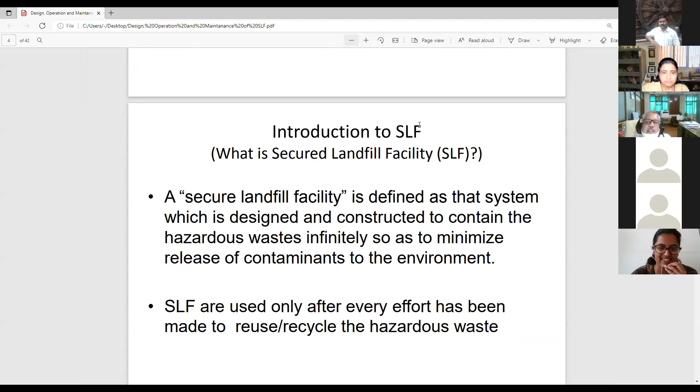So the topic is basically secured landfill for hazardous waste.

Will you please excuse me for 2-3 minutes? I have a few signatures to be done. Okay. Sorry, so just bear with us for another 2 minutes, then he is going to join. Professor Vaidya, you are muted. Am I audible now? Yes, sir.

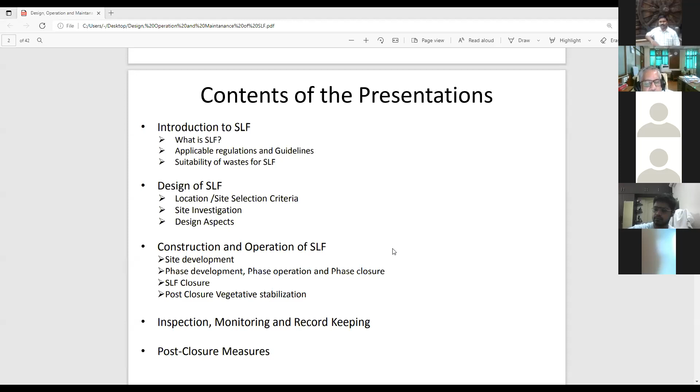So the topic is related to secured landfill for hazardous waste, not for municipal solid waste, hazardous waste. And what are the criteria, how it is designed, and how you go about the audit of this typical landfill. So this is the brief outline of the presentation. What is the SLF, secured landfill? What are the applicable regulations and guidelines? The suitability of waste for secured landfill, design of SLF, construction and operation of SLF, and then inspection, monitoring, record keeping. So I tried to cover all these things in brief.

So secured landfill is basically strictly for hazardous waste. Hazardous waste is basically a waste which is generated by industry most of the times, and which, as per the regulation, is categorized as hazardous waste. You cannot call just any waste hazardous or non-hazardous. There is a criteria in regulation which has to be fulfilled to constitute one waste as hazardous or not.

And there are two ways to dispose hazardous waste, we will come to that later on, depending on the rules and regulation. It can be incinerated or it has to be landfilled. And the secured landfill facility is for the hazardous waste, industrial hazardous waste, which cannot be incinerated.

So SLF is defined as that system which is designed and constructed to contain the hazardous wastes infinitely, so as to minimize release of contaminants to the environment. In short, you are disposing hazardous waste in such a way that all its ties with the environment are cut off. It's a kind of tomb, you can say, or graveyard for hazardous waste, so that it doesn't impact the environment directly.

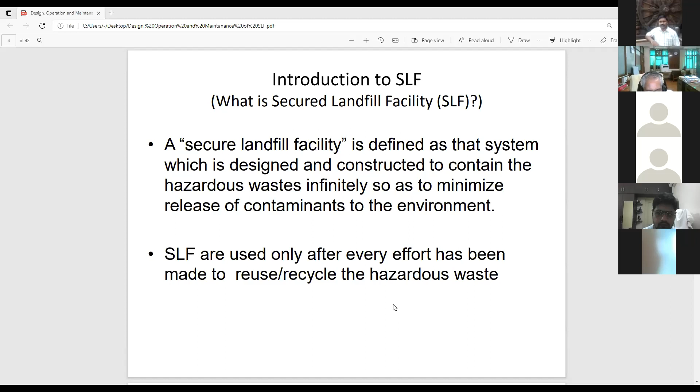And SLF are used only after every effort has been made to reuse and recycle. See, the hierarchy of waste management starts with waste minimization and finally goes to disposal. So if all your attempts for reuse and recycle are not economically or technically feasible, finally you have to go for secured landfill. That is the last option of waste management.

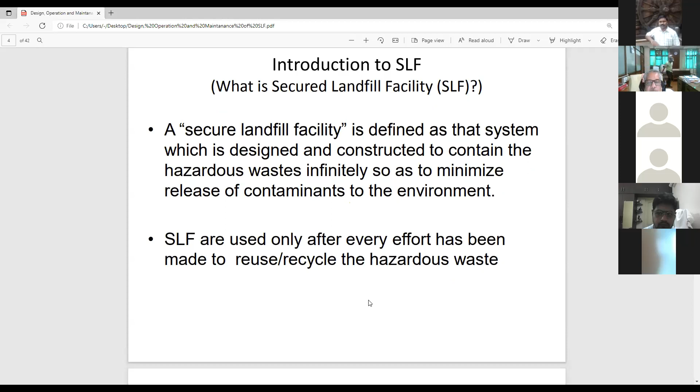Okay. Again, hold on for a while. Sorry for the interruption. There are certain official procedures I had to be involved in, and there are some urgent works from our stores and purchase. So I beg your pardon for this short leave and short break in the presentation. So let us go through the... Am I audible now? Yes, sir. You are audible.

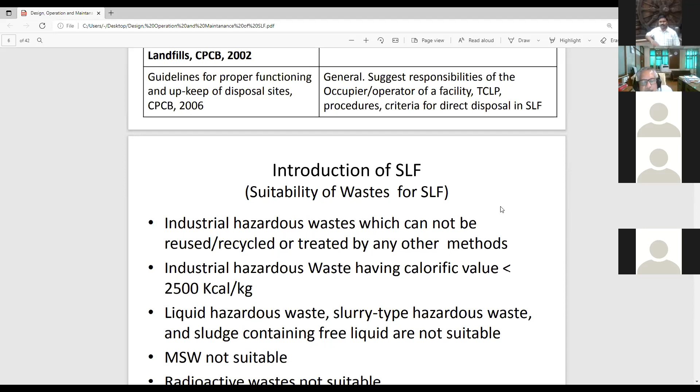There are only two ways of disposal prescribed in regulation. One is incineration, one is landfilling. And liquid hazardous waste, slurry type hazardous waste, and sludge containing free liquid are not suitable for landfilling; you have to make it suitable for landfilling. As it is, you cannot put liquid hazardous waste or slurry into landfills.

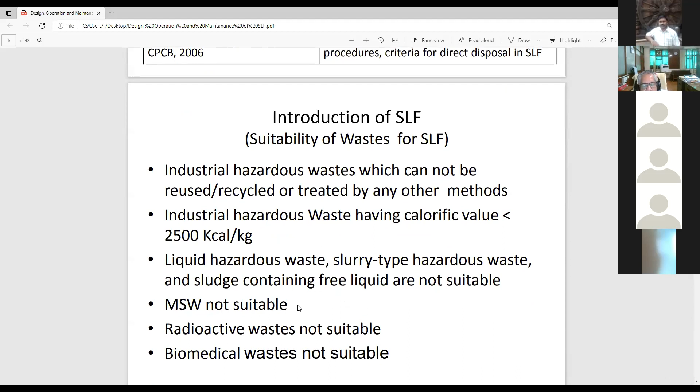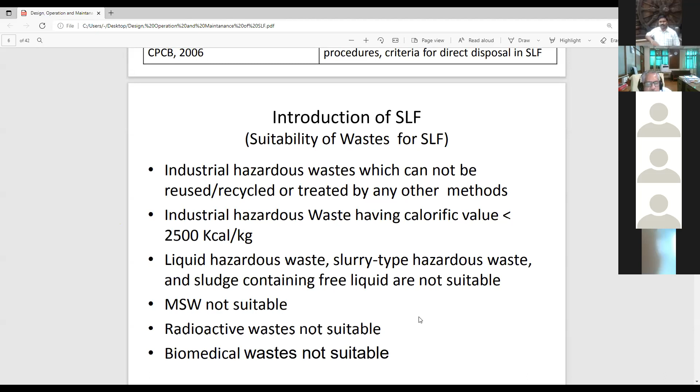Municipal solid waste is ruled out for secured landfill. It is only meant for industrial hazardous waste. Radioactive waste always has separate guidelines, which are only dealt with by Bhabha Atomic or the Department of Atomic Energy. Even we are not allowed to design anything or handle radioactive waste. Biomedical wastes are also not prescribed for secured landfill.

Now, what is the design of SLF? Now, you have to clearly understand secured landfill. There is actual civil construction, how liners are to be placed, all those things are there. But basically, the question is where the landfill itself should be located. And a landfill cannot be located at any location.

You have to have a detailed study of the area where the landfill is to be located, preferably a hydrogeological study, and all the details in and around that particular selected or proposed area. For example, it has to follow a minimum distance from any lake or pond. It should be away from any pond by at least 200 m.

Lake or pond minimum 200 meters. You cannot have anything within the radius of 200 meters. Then any river, flowing river, has to be minimum 100 meters away. Floodplain. Now river means floodplain. River is not the center of the river. Minimum distance from a maximum floodplain area should be 100 meters. That is the interpretation. And floodplain is decided on the 100-year data. You cannot have last year; the 100 years maximum floodplain you have to take, and for every river that data

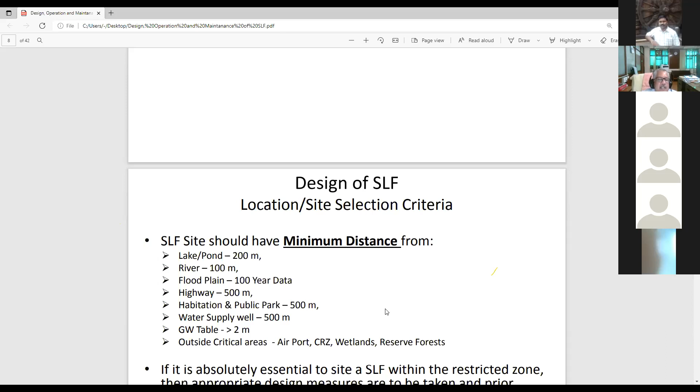And outside critical areas like airports, CRZ, wetlands, reserve forests, these are to be avoided. Even some monuments like Taj Mahal monument or some old forts, they cannot be in the near vicinity of the proposed landfill. These are the basic site selection criteria. Now you understand how difficult it is to get such a land, number one. But anyway, this is the criteria which is based on the environmental considerations. And if it is absolutely essential to site SLF within the restricted zone, then appropriate design measures are to be taken with prior permission from SPCB.

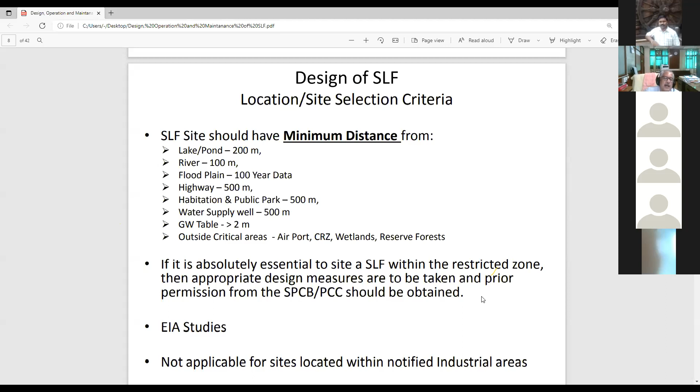Now, there are situations where you have to have a landfill within the restricted area. In that case, your landfill design becomes very rigorous and very robust and costly. And plus, you have to take care of all precautions in your design, with the prior permission of State Pollution Control Board. This is specifically allowed for some industries where there is no landfill available nearby. And then you have to go for environmental impact assessment studies for the proposed landfill site. And you have to get environmental clearance from the state appraisal committee most of the times.

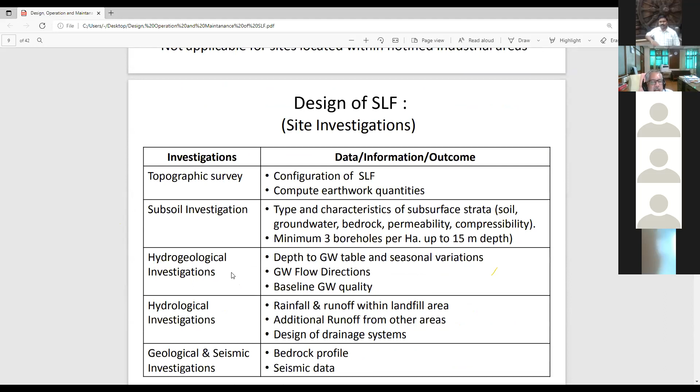And this is not applicable for the sites located within notified industrial area. Every state, every area has certain notified industrial areas. If proposed landfill is within that area, then probably you get rid of all these requirements. So these are the investigations which are required for the design of SLF. You need to have topographic survey, subsoil investigation, hydrogeological investigation, geological and seismic investigation. So practically you have to go for all on-ground and underground surveys for this particular design of the landfill, because we are dealing with hazardous waste and you are going to put it there for long term, probably infinite period, although we say 30-50 years, but that may not be

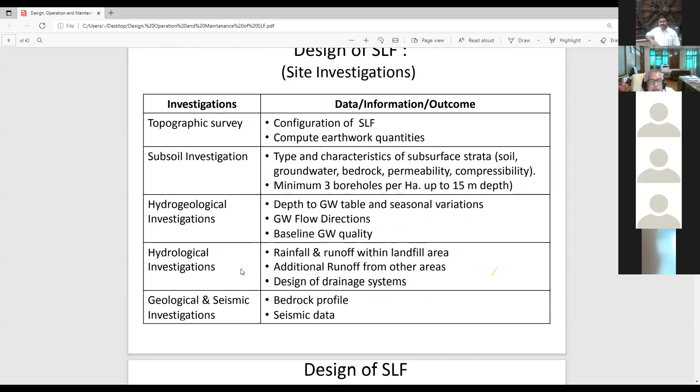enough. So the design life of secured landfill: active period will be 10 to 25 years depending on waste generation and availability of area. Closure and post closure period 30 years after active period. So you can say it's a total plan of 50-55 years, probably more than that. So active life and then post closure measures and monitoring is required. That is minimum for 30 years. This is the first criteria based on which your design is based.

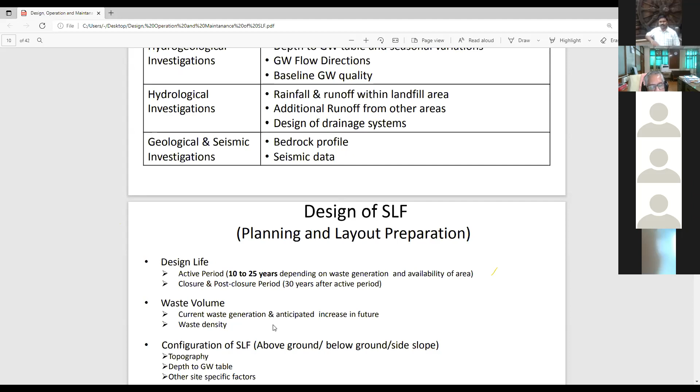Then waste volume. Waste volume is important as well as waste quantity, in terms of mass or weight, but volume is also important because you are going to put it in a restricted volume of landfill. Weight criteria is not there, it's basically volume criteria most of the times. Then configuration of SLF is to be decided on the basis of topography, depth of groundwater table, other site specific factors.

Just a minute, hold on, I am getting one call. Hello.

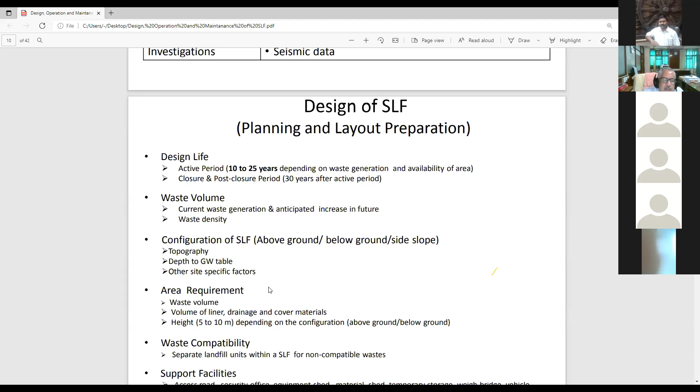See, if you want to invest, you can do anything, but then the cost and the stability requirements are to be met. So then area requirement will depend on waste volume, volume of liner, drainage and cover materials, and height of landfill. To what extent can you put waste into that? Now this is a question which is to be answered. So it will depend on whether the landfill is above ground or below ground, and the slope of the landfill and stability of the slope.

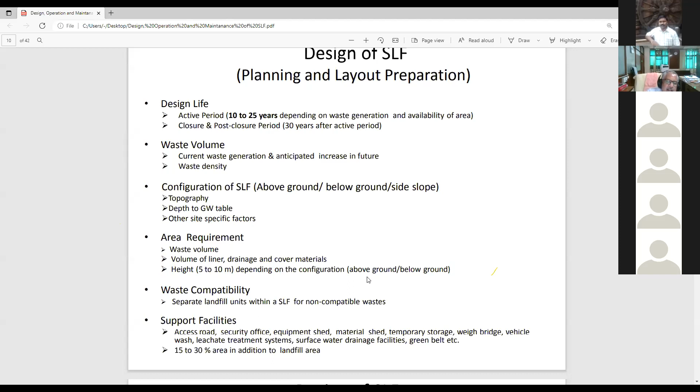You cannot have a vertical landfill unless it is concrete supported. Otherwise, normally it is a kind of pyramid, a kind of standard grave or standard tomb-like design. And for the side slopes, there are criteria given, 2:1 or something like that. And the stability of the slope becomes important to decide the maximum height of the landfill. And then the waste compatibility, support facilities, access road, security office, and the additional requirements in case of future or in case of some anomalies or shortcomings in your design, right?

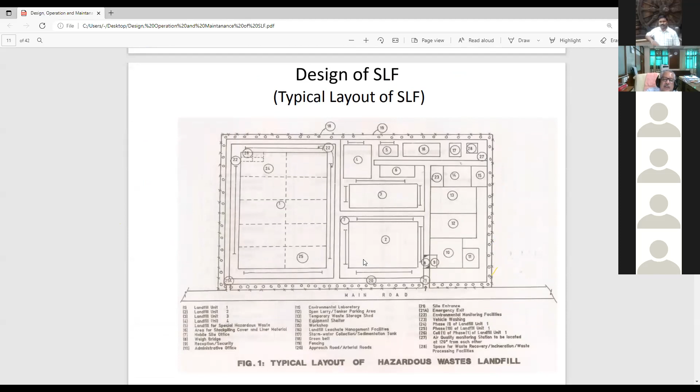So this is a typical layout for a secured landfill. You can see here, there can be landfill units 1, 2, 3, 4. Normally they are put adjacent, 1, 2, 3, 4, 5 like that. And there are all other things. There will be a laboratory nearby because you have to analyze the waste before putting it. Then you need a storage, a mobile site office, a weighbridge, reception and security. So whether it is a landfill or incineration, it becomes a kind of small industry in itself. I am talking of a common landfill site.

There are two types of landfills. One is captive landfill, where I, as an industry, am putting only my waste there. Still, I need all these facilities, but part of the industrial facilities can be used for that. And there are common landfill sites, because those industries which cannot afford hazardous waste management of their own, on payment basis, send their hazardous waste to these common facilities, and then the common facility is like an industry in itself. So you will find it's a kind of industrial layout. You can go through that.

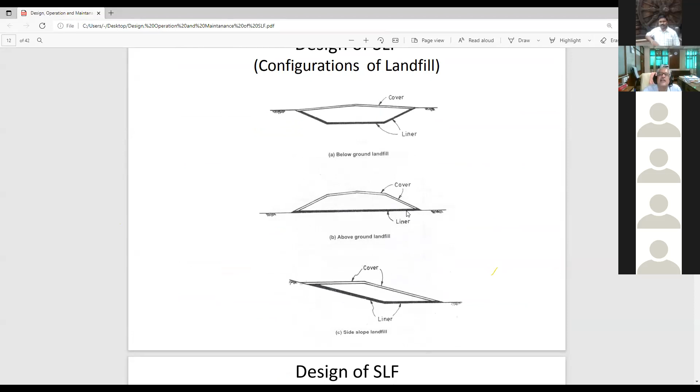And this is a typical design of the landfill. So it is a below ground landfill, figure A. Figure B is above ground. You can see the side slopes and cover at the end of this. And there can be sloping landfills also, because there are certain terrains where this kind of landfill is required.

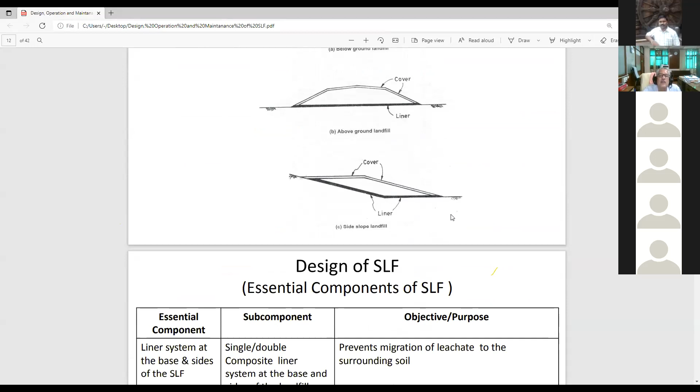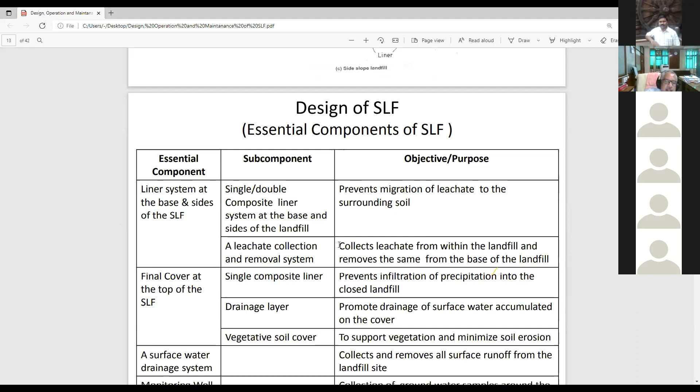Then essential components of landfill. There has to be a liner system at the base and sides of the secured landfill. It can be single, double or composite layer basis. Leachate collection and removal system is a must. What is the objective of landfill? It prevents the migration of leachate to the surrounding soil. Normally recommended is an HDPE liner, minimum 2 mm thickness. That is the minimum. If you have money, you can have 2.5 or 3, no issues. But it cannot be less than 2 mm. And it is an HDPE liner at the bottom and on the sides.

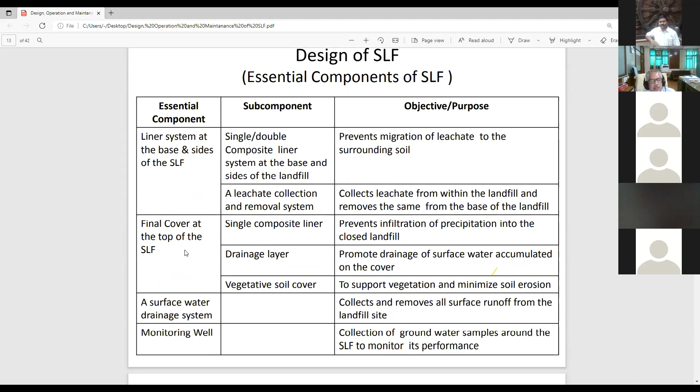And then you have to fill the landfill with waste, and finally a final cover at the top once the active life of the landfill is over and you don't have any more space to accommodate waste there; then it has to be properly covered. There is a procedure given for the secured landfill covering. So a single composite liner is there, a drainage layer is there, vegetative soil cover on the top of that, and then it looks like a recreational facility, but below it you have a lot of hazardous waste filled in.

And because there will be monsoon and rains on that, the surface water drainage system is a must; in any case you should not allow surface water or rainwater to get into the landfill. It has to be collected over the top of the landfill and properly separated. And an essential part of landfill is that around the landfill, you must have monitoring wells drilled specifically to monitor whether the landfill is intact or not, and the analysis of monitoring well water...

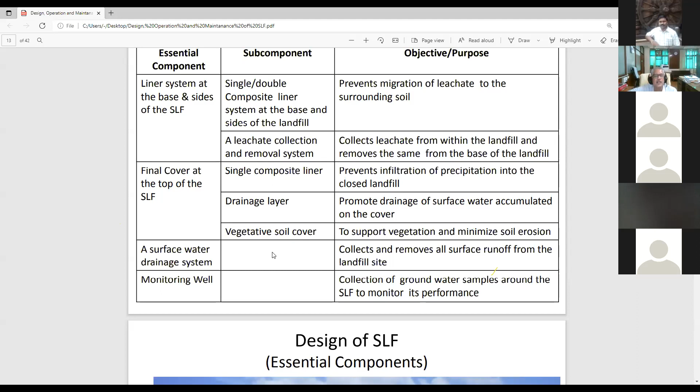You cannot imagine a landfill without a monitoring well. Otherwise, that cannot be. Then you have to drill another well for that. Now this is a typical design of SLF essential components. This you will find in any book, CPCB guidelines or on the internet. So there will be a primary leachate collection.

Now you can see it's a double liner system. So primary liner and secondary liner. And then there is a secondary leak detection. Secondary well is there, leachate collection. If you find anything in this, that means there is something broken here. Because no water or liquid is supposed to be collected in this area between the secondary and below the secondary liner. And if you get something here, that means primary and secondary both are broken.

So you can have this kind of 2-3 leachate systems. So the primary leachate system is a general leachate which is collected from waste, and that has to be treated separately. But secondary leachate should not be there. Otherwise, it indicates there is some flaw in the design or some breach in the landfill design.

And then you can have geomembrane, you can have soil cover. These are all different things. Basically you have to prepare a ground, then you have to lay the HDPE liner, then again you have to put a drainage layer and then soil cover, and every time there is a standard procedure given in all manuals.

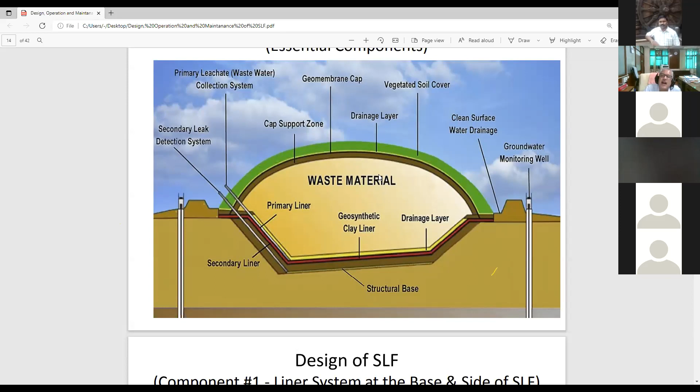And these are groundwater monitoring wells you can see around. These monitoring wells will indicate whether landfills have broken and they are contaminating the subsurface water or soil. This is for that.

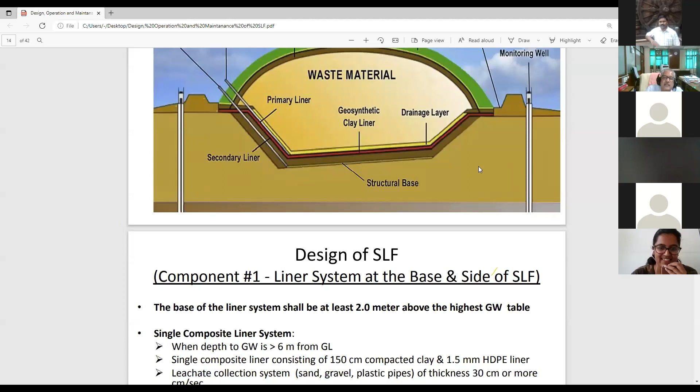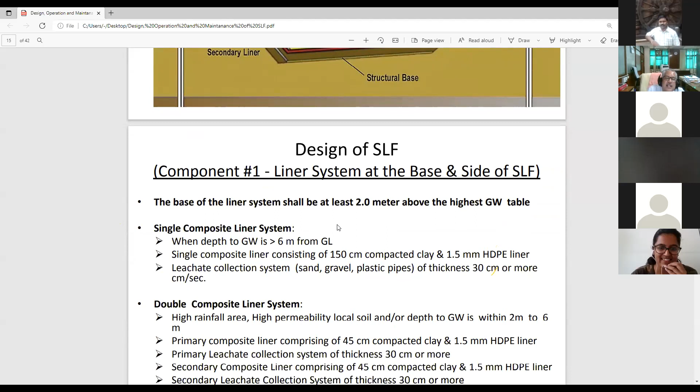Then liner system: there can be a single composite liner system when depth of groundwater is more than 6 meters below ground level. And double liner for high rainfall area, high permeability local soil, or depth of groundwater within 2 meters to 6 meters. Then you should have a double composite liner system, so that you doubly ensure that there is no breakage or it takes the load of heavy rains in that area.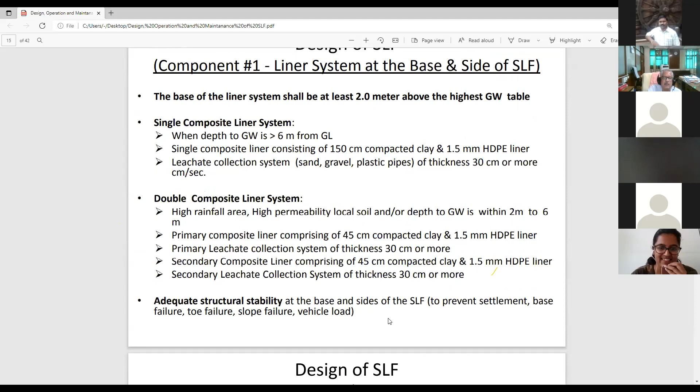And you have to ensure adequate structural stability at the base and the sides of the landfill. This is a typical civil engineering problem. It's a pyramid-like structure. So all cross sections are like trapezium, and you have to take care of adequate structural stability issues. Good institutions can work out that.

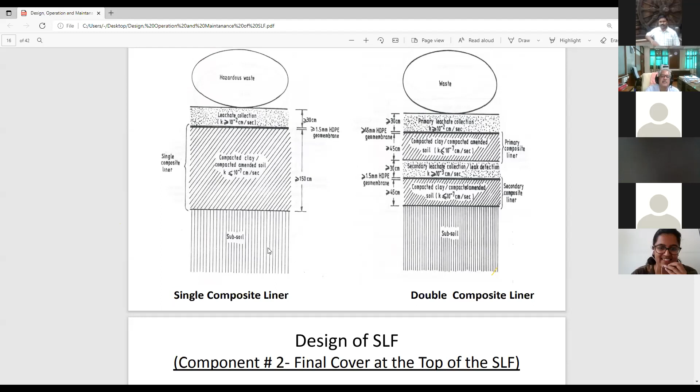So the cross section of a single and double system, this is available. You can see this is a cross section. If I cut the landfill vertically from the center, it will look like this. So hazardous waste will be on the top, then leachate collection system, then compacted clay and subsoil, and single composite or double composite liner. So this standard design you can see in most places.

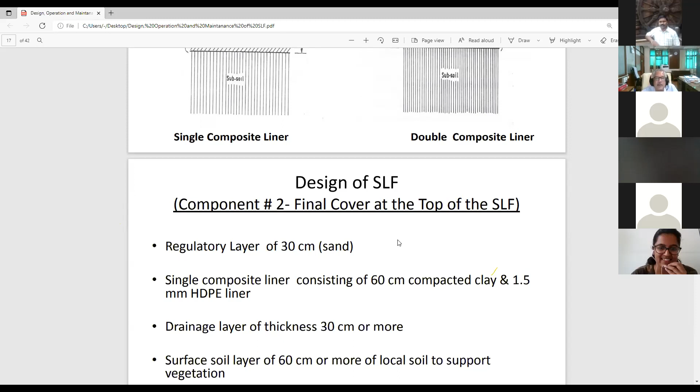And then final cover, when the active life of the landfill is over and you have to cover it finally. So there are procedures laid down by CPCB on this. So regulatory layer of 30 centimeters, then sand, then single composite liner consisting of 60 centimeter compacted clay, 1.5 mm HDPE liner, drainage layer of thickness 30 centimeters. This is for surface rainwater, surface soil layer, adequate structural stability, and adequate side slopes to prevent failure.

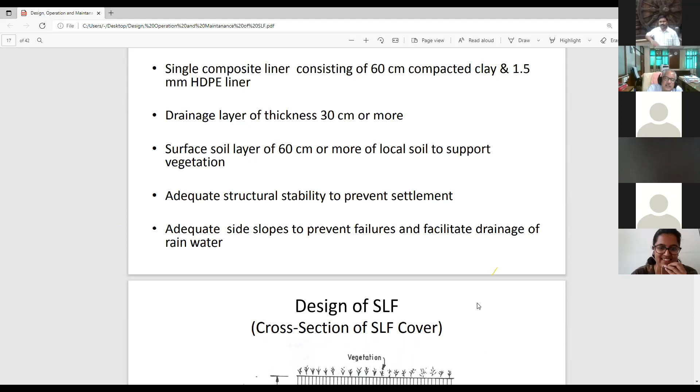Now we have seen certain landfills which basically collapsed because these side slopes were not stabilized or they were not within the standard limits. Very vertical, and they were earthen slopes, not concrete supported. So there were collapses like that.

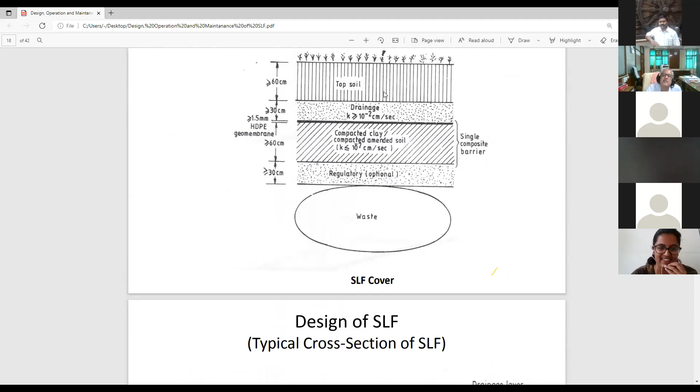And this is a typical cross section of SLF cover. You can see now hazardous waste is at the bottom. Then on the top of hazardous waste, there is a regulatory layer, then compacted clay, then drainage layer and topsoil. And finally, you can put vegetation, and then it looks like a beautiful garden.

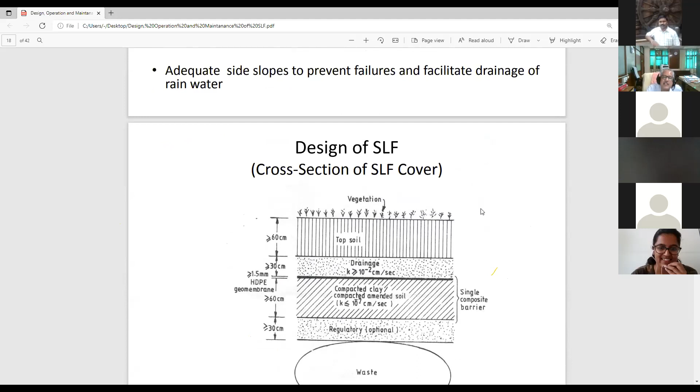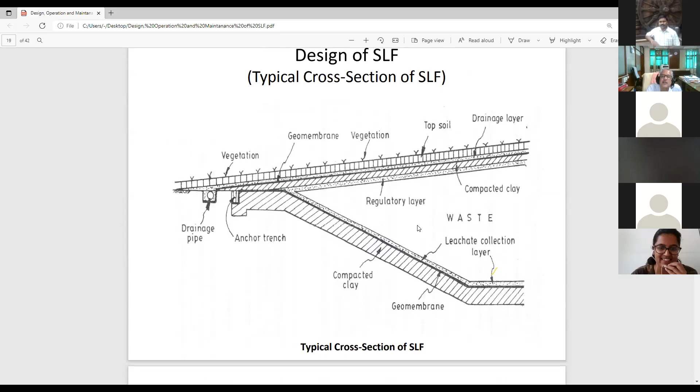If you go to certain facilities which are already covered, end of life landfills, you can even have a picnic. If they are very secured, it looks very nice, if somebody has done a good job on that. So these are the basic civil engineering details of the typical cross section of a landfill. I will not get into that.

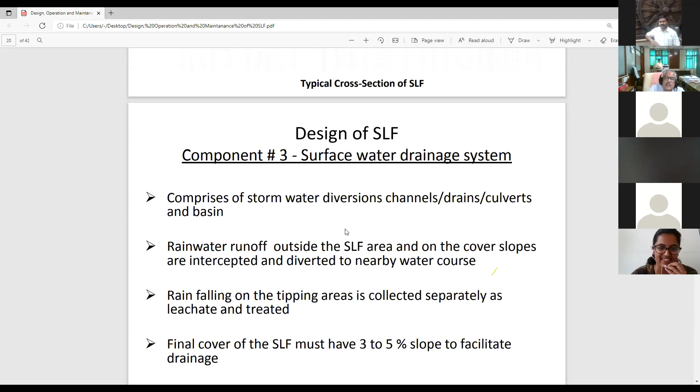So the purpose of the surface water drainage system is this, because for 30 years you will always be facing monsoon, 30 monsoons minimum. So all the proper slopes, collection facilities, drainage facilities are to be there. So you can see here the surface drainage systems which are given here.

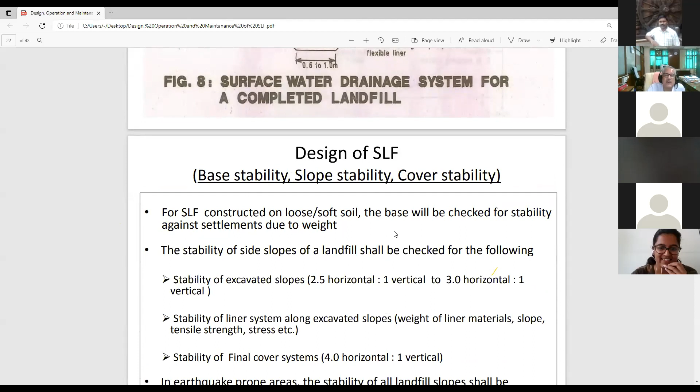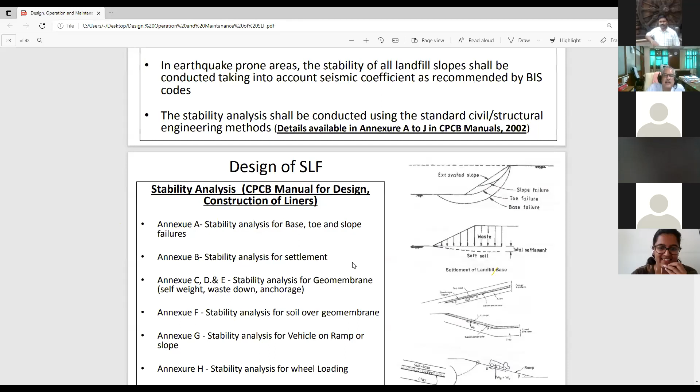Surface drainage systems, then design of secured landfill, base stability, slope stability. Now, I will not get into details of this. Probably other lectures might have covered this for municipal solid waste, probably for hazardous waste also. And everything is given in the CPCB manual. So I recommend all of you to read the Central Pollution Control Board manual for this.

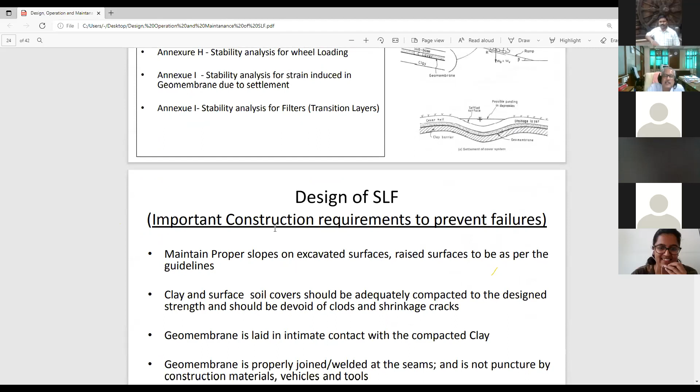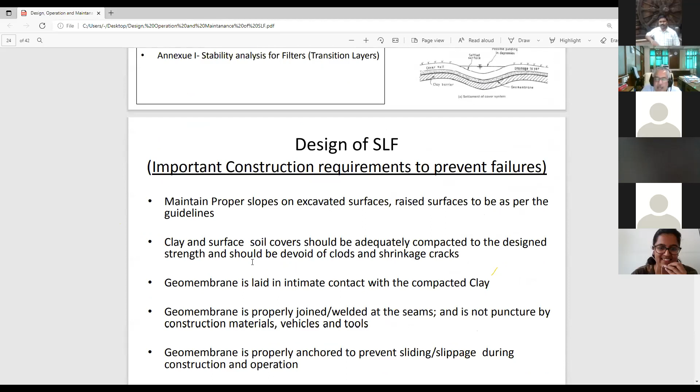And important construction requirements to prevent failures: maintain proper slope of excavated surface. This is very important. And then clay and surface soil cover should be adequately compacted, geomembrane properly. See, these are all basic instructions to have a secured landfill in place and stable.

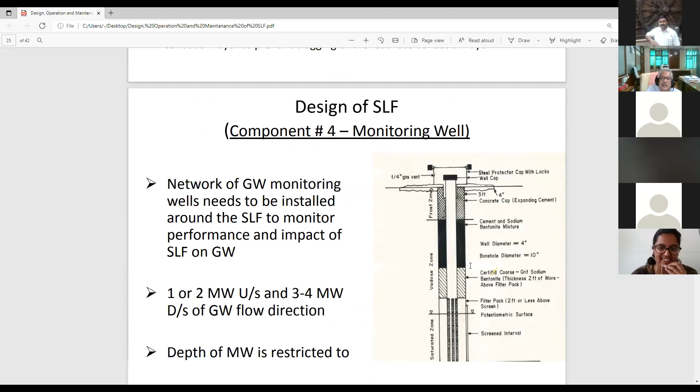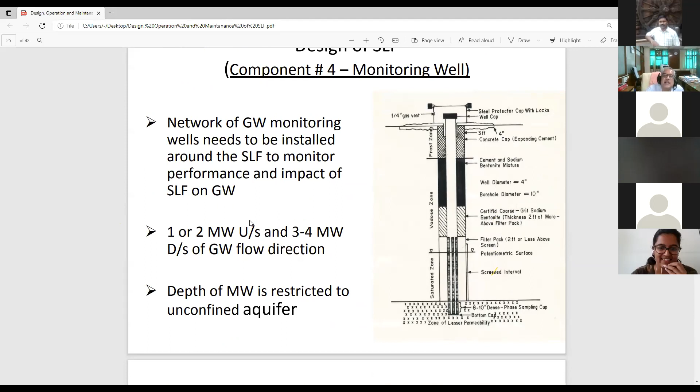Then monitoring well design has also been given, so it should be like this, according to the groundwater flow direction. There should be one or two in the upstream direction, and downstream there should be more, depending on the hydrogeology, and the diameter and everything has been recommended properly in the CPCB manual. But a monitoring well is an essential part of a landfill. I would say that without a monitoring well, you cannot say a landfill is complete.

And construction and operation of the landfill. So, okay, thank you. Okay.

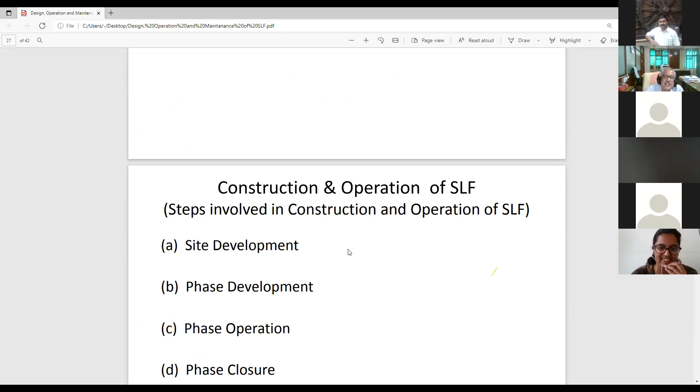So basically you start with site development, then phase development, phase operation, phase closure, landfill closure, and then post closure. See, the site has to be developed first for the landfill, and then you have to start operating it. Operating means what? You have to collect the waste, the proper type of waste, put it into the landfill, compact it properly, and operate in such a way that all your moving machinery like JCB is properly laid down. It doesn't disturb the liner system and properly gets into the landfill. It needs a lot of planning. You cannot have random planning for that.

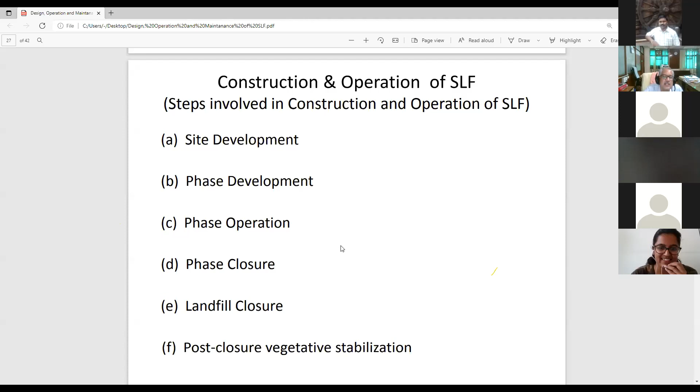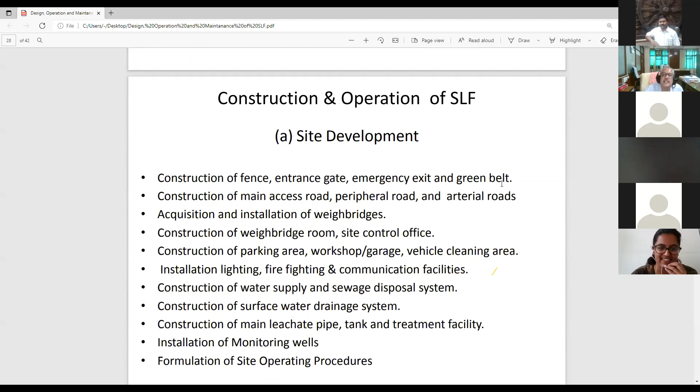And then after the active life, meaning the volume of the landfill is full, you have to close the landfill with proper procedure. So construction of fence, entrance gate, emergency exit, green belt, everything is required. Construction of main access road, construction of weighbridge. All these I will not read. After a little bit of editing I will share this PDF with the organizers for the benefit of all participants.

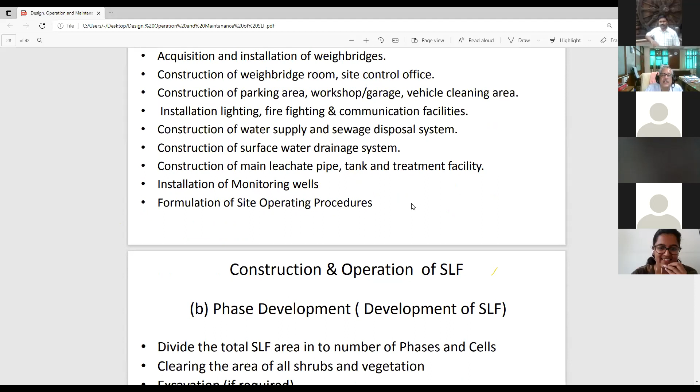So divide the total into a number of phases. See, there is a total area. It is not advisable to put everything like a trench. So basically there can be compartments; most of the times they call it a cell. So landfill 1 cell 1, landfill 1 cell 2, landfill 1 cell 3 like that, and still you can have different phases. So you have to fill the waste cell wise. First cell is filled, then you go to the second cell, third cell. Slowly you complete the landfill because it's a huge area. Unless you visit, you will not realize it appears like a big pond itself.

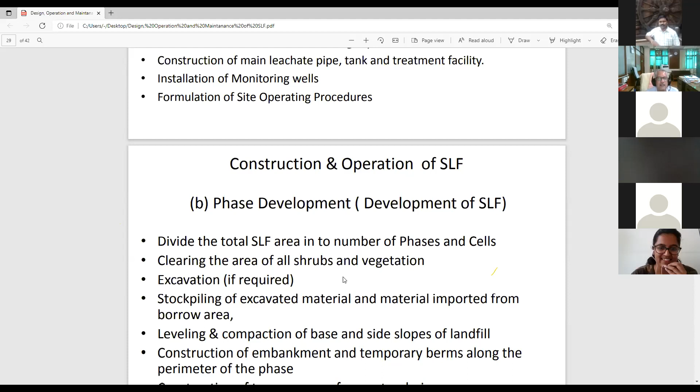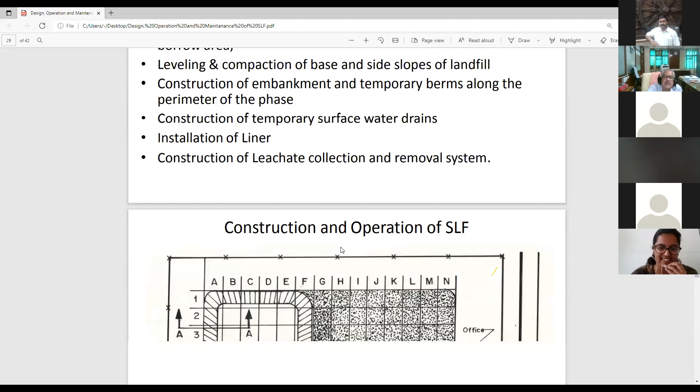And that area has to be cleared of all shrubs and vegetation. Then proper excavation has to be done if it is an underground landfill. Stockpiling of the excavated material and material imported from borrow area, leveling, compaction of the base. Before making a landfill, the base should be very highly compacted and very even, otherwise it will have stress on the liner, and the liner may have punctures. So construction of embankment, temporary surface water drains, installation of liner, typical standard civil engineering details. This is all in the construction phase.

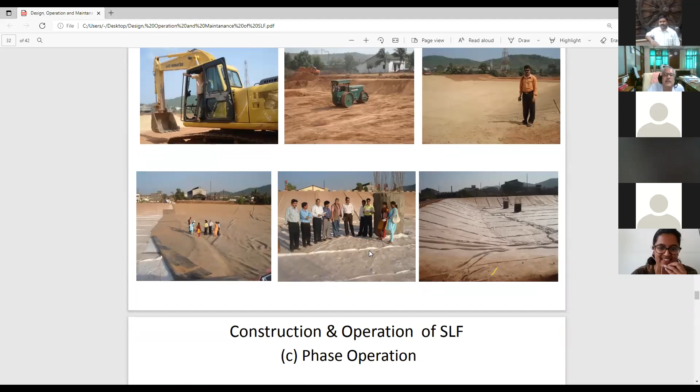These are all basic designs, and these landfill sites, we have constructed, designed and vetted certain landfills. See, this is a preliminary stage, how a base is actually leveled. You can see my colleague Dr. Patil standing here, and then how liners are typically laid. You can see a huge area here. You will not have an entire liner, so pieces of liners are to be sealed. You can see the seal here.

That seal is to be tested for whether it is a watertight, airtight seal or not. Testing procedures are there, and you can see collection. These pillars are basically for leachate collection. So leachate is to be collected and pumped out. So right from the beginning, you need a planning like that.

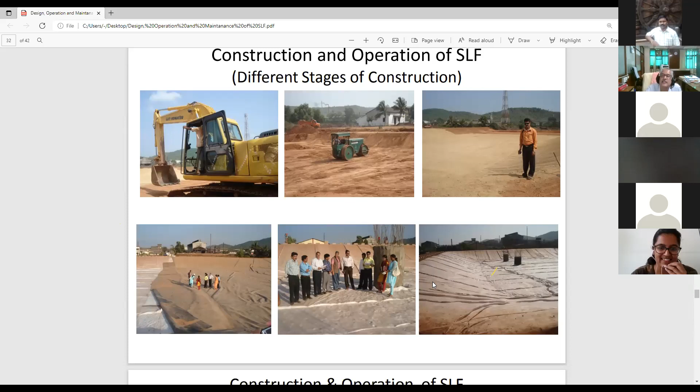Then you can see the side slopes, how liner is taken on that. So these are probably from Goa, most probably, these photographs. You can see myself here. I was young that time. You can see this is me.

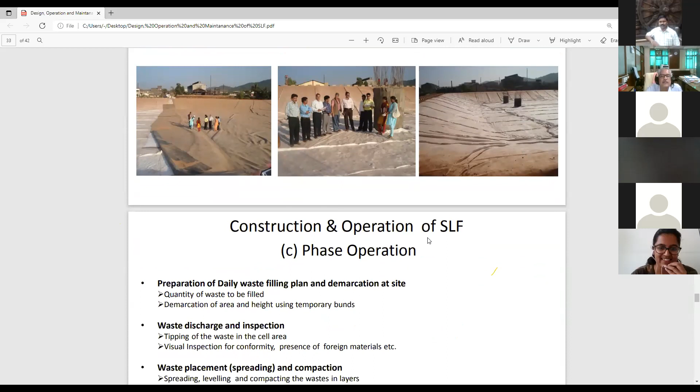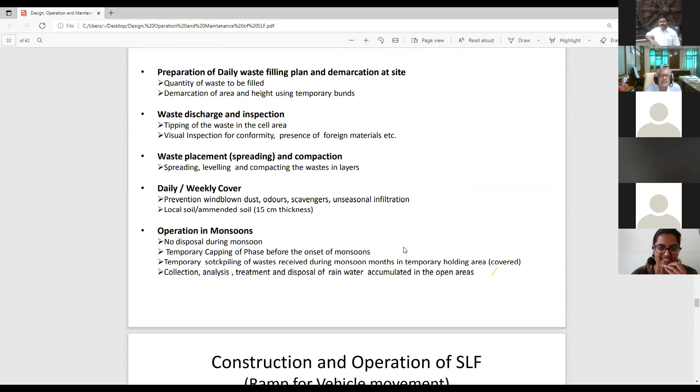So construction and operation of landfill. So preparation of daily waste filling plan, waste discharge and inspection, waste placement. These all details are there. You can work out. And then landfill is to be operated for landfilling. It is as simple as that.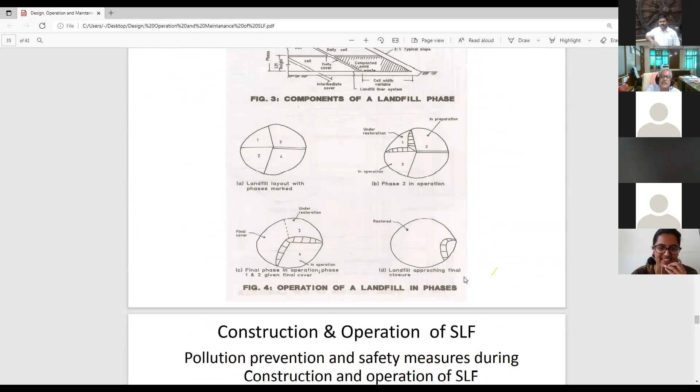I will just take 1 or 2 minutes here. You can see 1, 2, 3, 4. These are the cells. So you have to go step by step: under restoration, in preparation, in operation. Like one cell is closed, then you start restoring or capping it. Start operating the second cell. Start preparing the third cell. It's like that. So it should be in a planned and phase-wise manner.

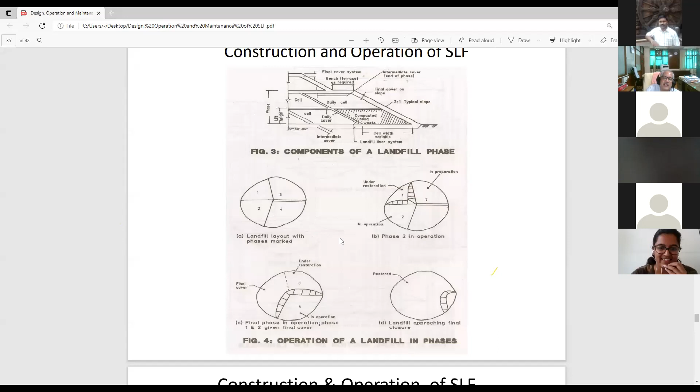Otherwise, what happens? You cannot wait. Cell one is full, and immediately two is not prepared. So your preparation has to be in advance. Construction and operation, again continuing with that.

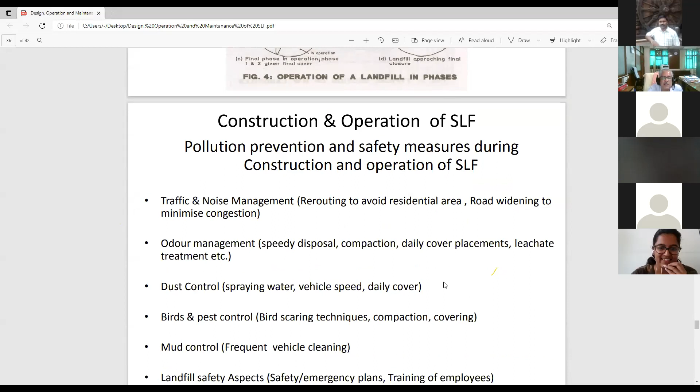Other things are not very important from design point of view, but from management point of view: monitoring the traffic and noise management, odor management. Because there will be odors, you are dealing with hazardous waste. Dust control, there will be a lot of traffic, so you have to spray water. You can see in any good facility, water is sprayed for dust control. Birds and pest control, mud control, landfill safety aspects, emergency plans, everything is there. It's like a full-fledged industry.

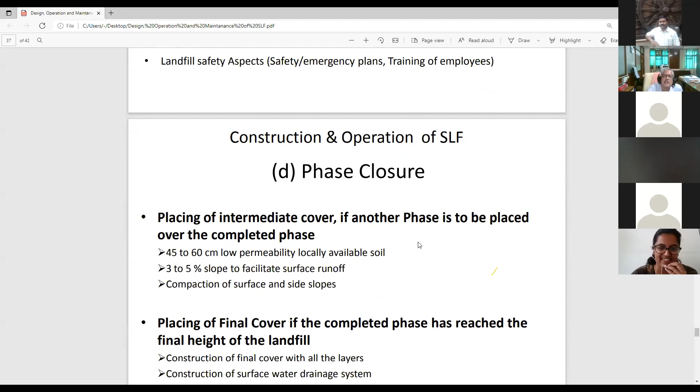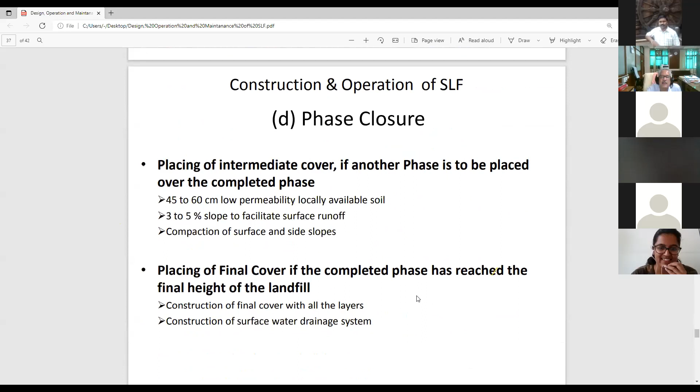And then a landfill is to be closed. So closure is also to be phase-wise. You have to close the landfill, you have to put soil cover, you have to put finally an HDPE cover on that, and then again a soil layer on that HDPE cover, and then vegetation on the top of that. So these procedures are mentioned in the CPCB manual. It is a standard procedure. When all the phases of SLF are completed, design active life is achieved.

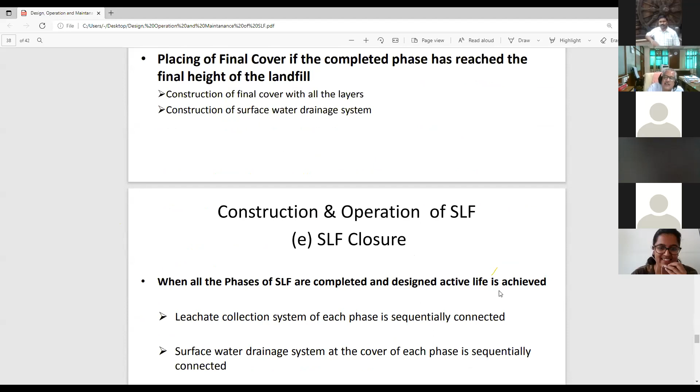Now active life is something which you estimate to be around 15-20 years, but there are instances where active life was quickly over because the landfill was full. There was no more space because of some errors in volume calculation and other calculations. But anyway, that is not an emergency thing. You start realizing that the landfill is getting over once it is 50% filled. So all that planning and monitoring is required, and then post-closure vegetative stabilization is there.

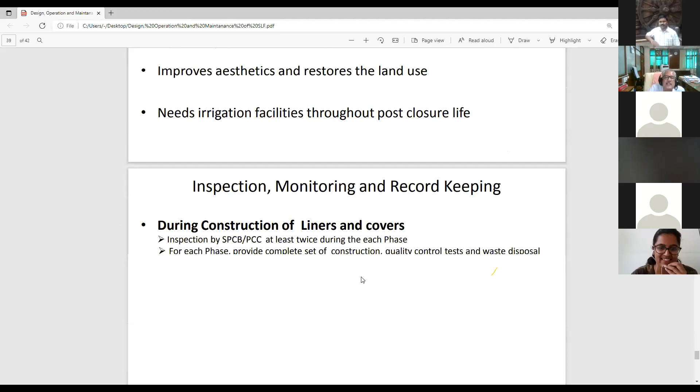Now, the most important part is inspection, monitoring, and record keeping. So this is what audit is for. Normally, a facility will have some landfill in operation, some landfill closed, and some landfill proposed. So you have to inspect it during construction, during operation, during closure, post-closure. So inspection of a facility is very important for all engineers, all environmental professionals.

So basically you have to envisage how the landfill is operated. For auditing, there is waste which is coming to the landfill site. So you must have a waste receiving system. In CPCB guidelines and rules and regulations, there is a manifest system: every waste is recorded on the manifest, and one copy goes to the owner, one copy goes to the landfill owner, one copy goes to the operator, one copy goes to the pollution control board. So there is a full-fledged, foolproof manifest system.

So whatever truck of waste is coming, it is all labeled. You know precisely what is coming to your landfill, and there is a record of that. So as an auditor, you have to first check whether these records are properly kept and received waste is properly received. And once waste is received, it has to be analyzed. If calorific value is more than 2500 kilocalories per kg, then it cannot be put into landfill. You cannot accept slurry. If you are accepting slurry, you have to stabilize and solidify it before putting it into landfill.

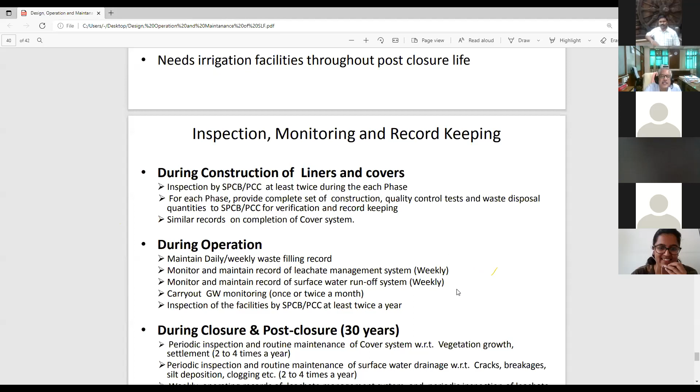So physico-chemical analysis of the waste, and a laboratory, is a must. Everybody should be aware of safety measures, storage of waste, all those facilities. During operation also you have to check whether a leachate management system is there, whether leachate treatment is there or not; landfill design has to be looked into. You can check the analysis of the leachate from the second leachate well, whether there is any leakage or not. So audit is basically for the design of the landfill.

Design of the landfill means you have to get all the documents. You must check all the documents right from the criteria of site selection, how the site was selected, whether the double liner system is there, the single liner system is there, whether monitoring wells are there, what is the design of monitoring wells, what is the leachate collection system, leachate treatment system, how waste is going to be put into that. All this planning, there will be a complete design document of the landfill, which must be available with a good engineering firm. If they don't have, that means there is some gadbad, or you can modify that. But normally good engineering practice is to be followed in design of landfill.

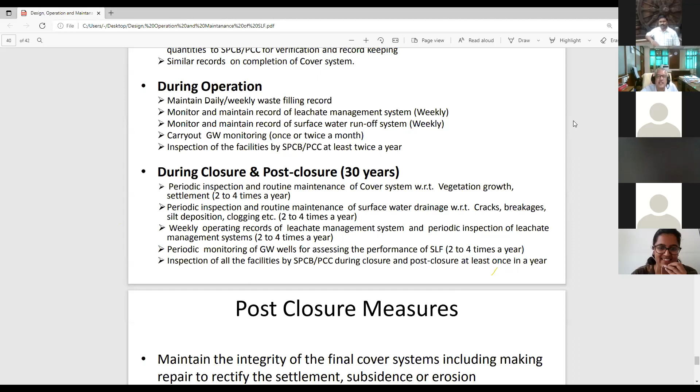And then operational manual also is there: how landfill is to be operated, how waste is to be taken, how waste is to be stabilized, solidified, and what is the expected life of the landfill, how it is to be filled. Everything is there in the manual. That manual has to be checked, and all the procedures are to be audited or checked vis-a-vis the regulation. You must have the regulation pakka, by heart. Hazardous Waste Management Regulation 2016, what it says, and whether that regulation is being followed.

There are criteria, there are schedules, schedule 1, 2, 3, 4, 5, whether waste received are following those schedules or not. Regulation is a big subject in itself, but you have to be thorough with all those things. The purpose of landfill audit: a good auditor will know the basics of the design. Good auditor will be good in designing also. Good auditor will know basic operational procedures for the landfill. Good auditor will be thorough in regulations and guidelines given by CPCB and Ministry of Environment, Forest and Climate Change. And good auditor will know where to look for the records.

And then he must prepare a report of audit, whether landfill is properly designed, whether landfill is properly operated. If not, what are the flaws and how they are to be rectified, whether they are going to have a long-term or short-term damage on the environment. And if any landfill is having damage or impact on the environment, how it is to be minimized or remediated. So once the audit of landfill is over, if you think there is an impact on the environment, then you get into a different mode of environmental regulation, that is remediation of that land which is already impacted by the landfill.

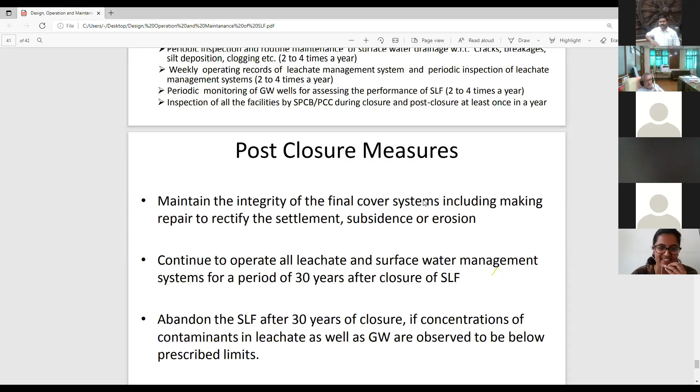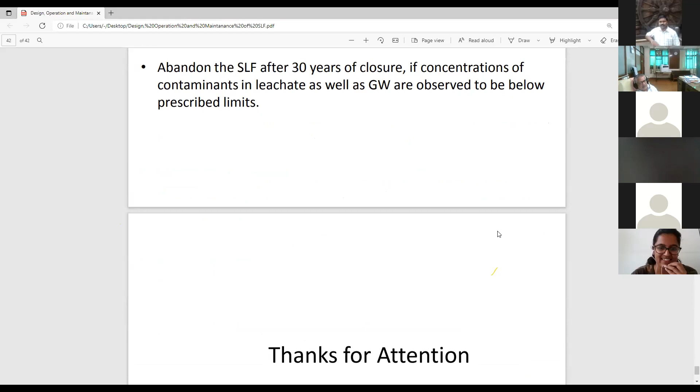There are instances where landfill was breached, there were certain problems in the surrounding areas, groundwater is contaminated or soil is contaminated, agriculture land was disturbed. In that case, obviously a facility has to repay the damage cost, local cost, social cost, and then remediation of the surrounding areas has to be done by that particular facility. So design of landfill, operation of a landfill, and auditing of the landfill in itself are big issues, but I tried to cover the basic aspects of landfill design and auditing. I look at it from auditing point of view.

I think most of the participants will need the auditing and design systems. At least you will have to examine the things. Few of them can get into the actual design of the landfill, and few of them can get into the operational systems. But most of them must be aware of the basic things, what is required for landfill design, how landfill is operated and how it is to be audited. What are the basic minimum requirements of a good landfill facility? So I tried to cover this in very short time.